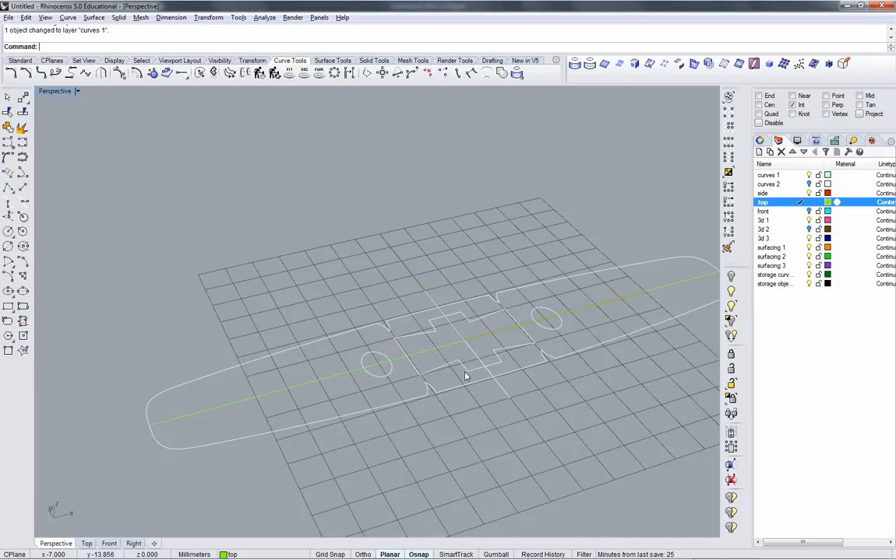Hi, it's Professor Tim Nelson with the Jewelry Design Department at FIT, continuing in our series of tutorials on making maquettes, this one for our cuff bangle. So, it's time for me to start surfacing this maquette.

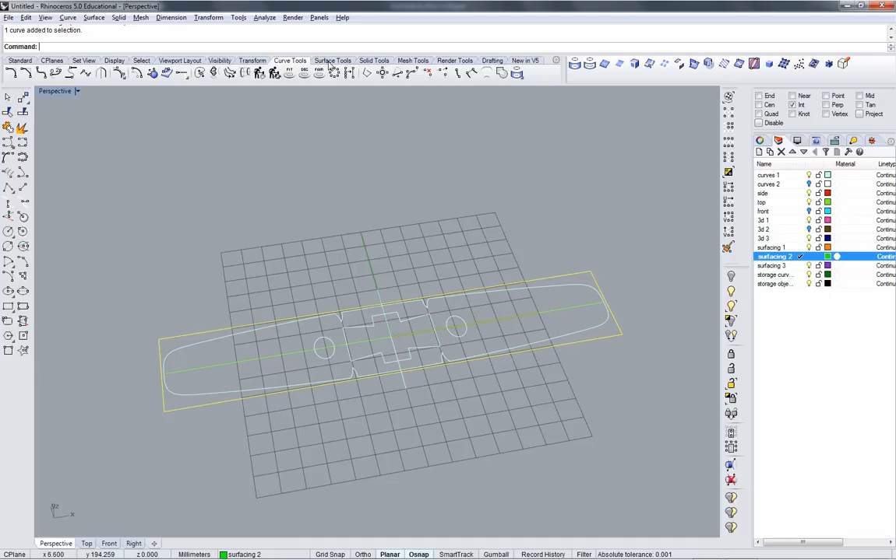I'm going to draw a rectangle from center. I just want a rectangle that's big enough to hold my object. That's fine, and I'm going to make a planar surface from it. I can then delete that curve. I'm going to rebuild this surface. I want to have 5 control points coming across and 11 going this way.

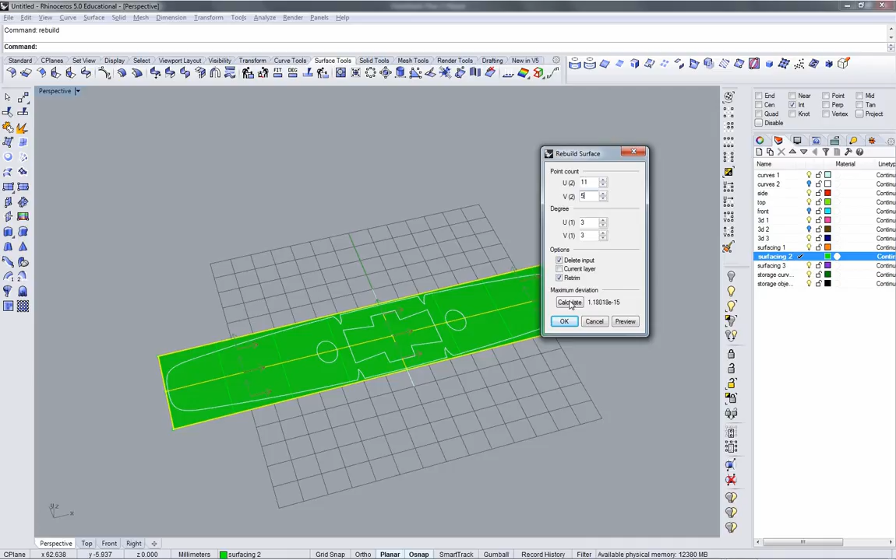That looks wrong to me. That looks better. See, I can see the partitions this way. Turn on my control points. Yes, that's what I expected to see. I'm going to move this off the ground. My maquette, my initial offset was about 4 millimeters, so I'll try that.

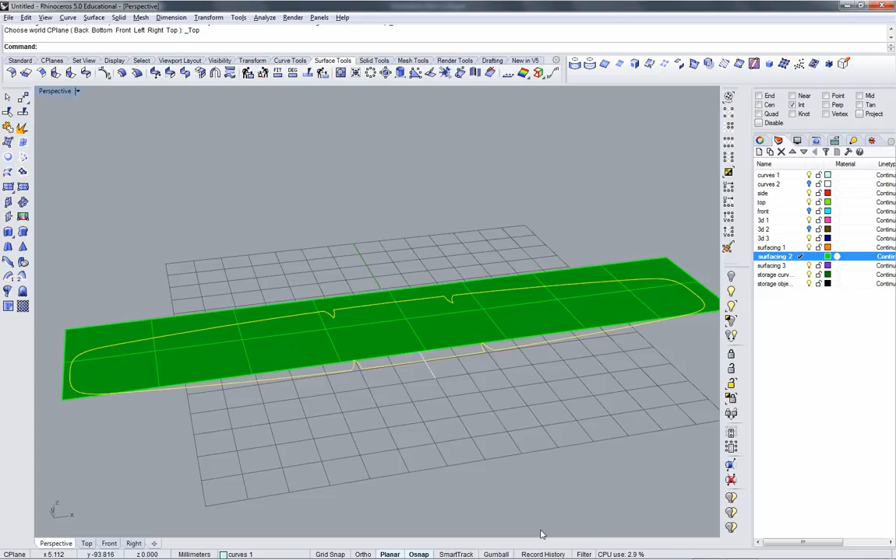And I'm going to take my outline, and I am going to record history and project it up. I have to change the top C-plane so I can project it onto that surface properly. So record history is on. Project, delete input, no, that's important because if you lose your input curve, history will be invalid, it won't work. I'm going to check and make sure this is working properly. It is. The curve's followed.

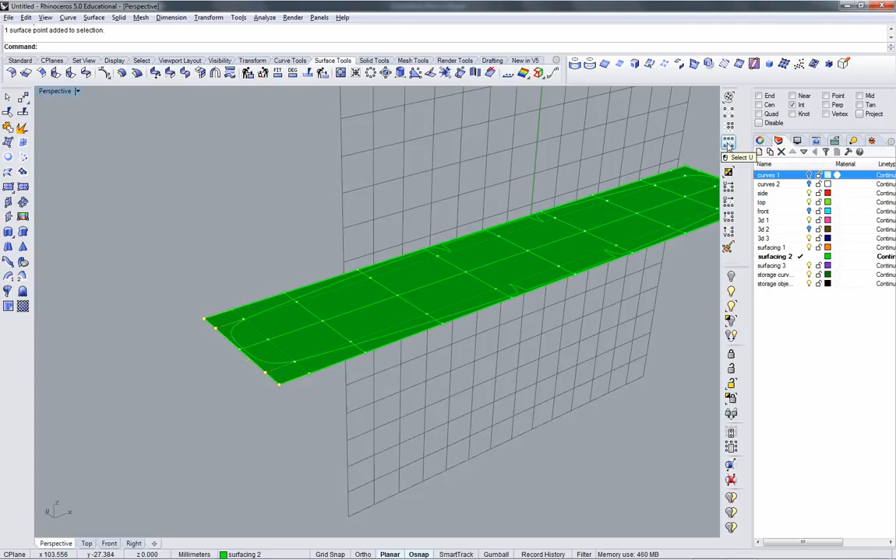Alright, turn on my control points. And I'm going to start doing some control point editing. Mainly want to move the outer 2 rows. So I'm going to select the points at the end here and I'm going to try select U. It could be either U or V. Oh, lucky. It's U. I'm going to move those down. Just by eye. And then I'm going to take the outermost row of points and move them down again.

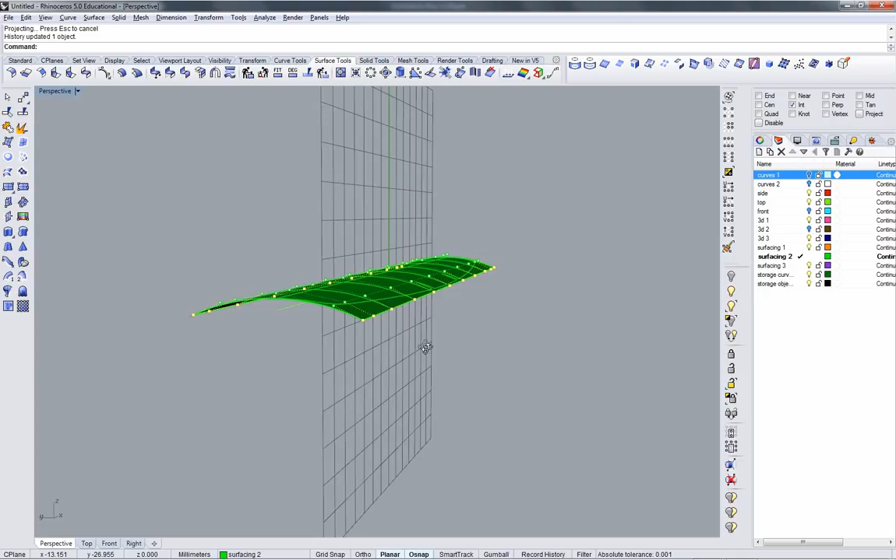And I'm going to grab the center row. I'm going to move it up. So I get a nice dome. You'll notice how the curve is following each step along the way. Now in my image, I have, well, it's got an edge and a fairly low dome, so I think that's actually pretty good. I want to kind of get a feeling of that rolled edge, so I'm going to insert knot.

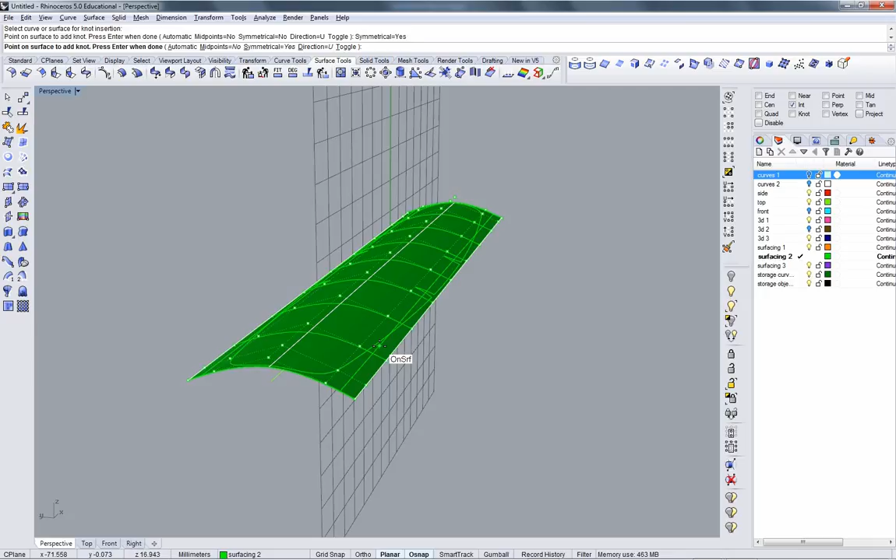Okay, it is going the proper direction. If it wasn't, I would hit toggle. But I want it to go symmetrical, so I'm going to hit symmetrical, yes. And I want to add the row of points between the outer 2 on each side. Just like that. I'm going to grab these 2 rows and move them up. And you see that allows me to get a harder roll off of that edge.

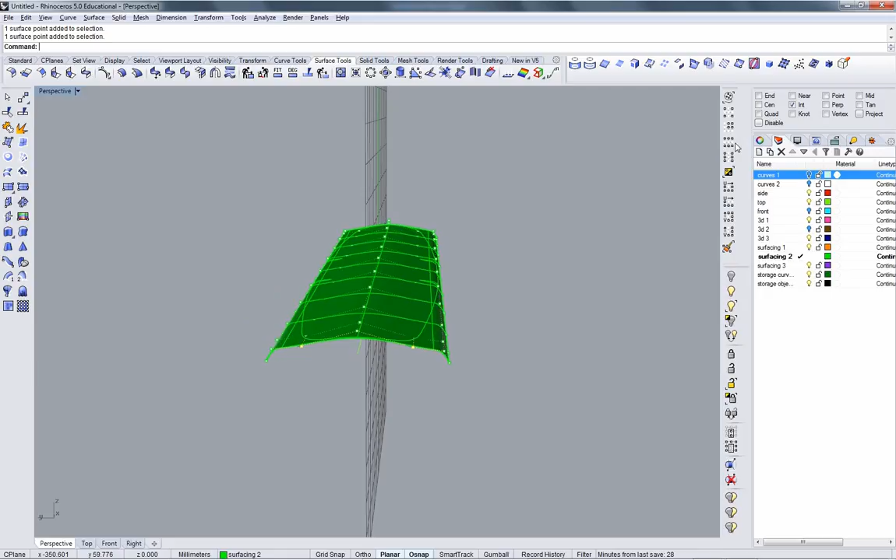Grab these. So, you know, I don't want to go crazy with effort here. It's not hard to do, and I'm here, I might as well do it. And then maybe move these back down just a little bit. May have been a little extreme. There, I like that.

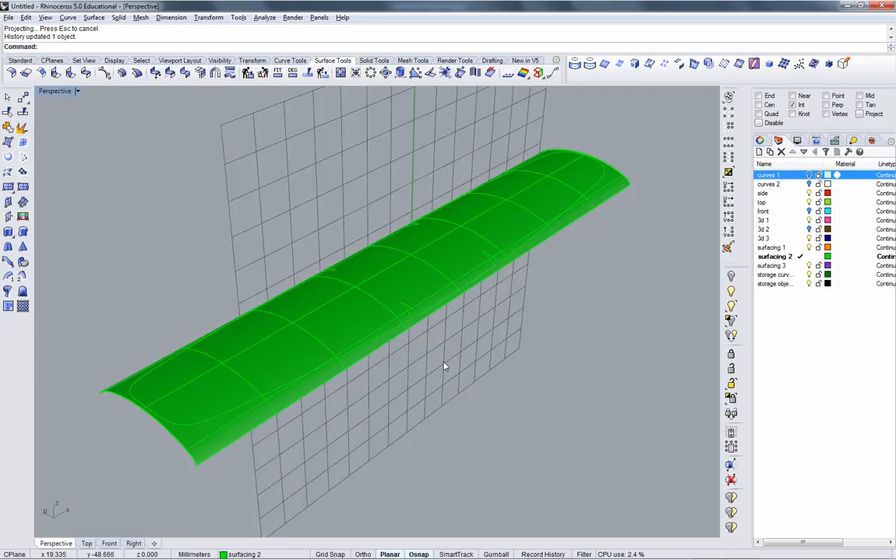Okay. The other thing I have to be aware of is, do you see how, from the front, my drawing is swooping up kind of like a pagoda at the ends? I don't want that. So I need to put them in a color I can see well. I'm going to turn the points back on. But now I'm going to actually dome it going this way a little bit. So I'm going to grab the 3 rows on each end, because I want it to be symmetrical.

Which is why, by the way, we put 11 rows, so we'd have a center row. Makes being symmetrical easier. I'm going to bring this down to about there. Deselect the end row. Move these two up a little bit. Deselect the second to the end row. And move this up a little bit. I'm not going to belabor it because it is a maquette.

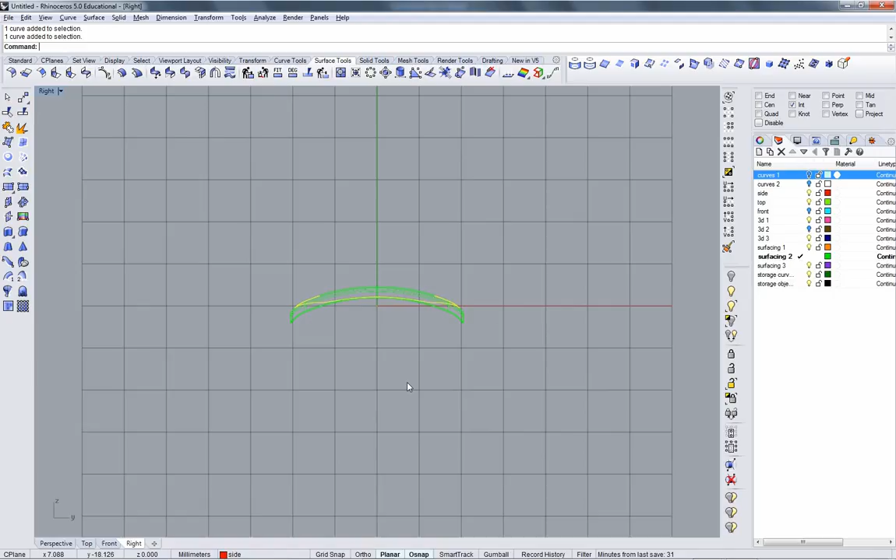I'm going to grab all 3 rows again on each end. It's not going down enough. And I'm going to grab this next row in. And I think that is better. Deselect the innermost rows back out again. And it won't be perfectly smooth, but this is a much more normal curvature. Okay, I'm all right with that.

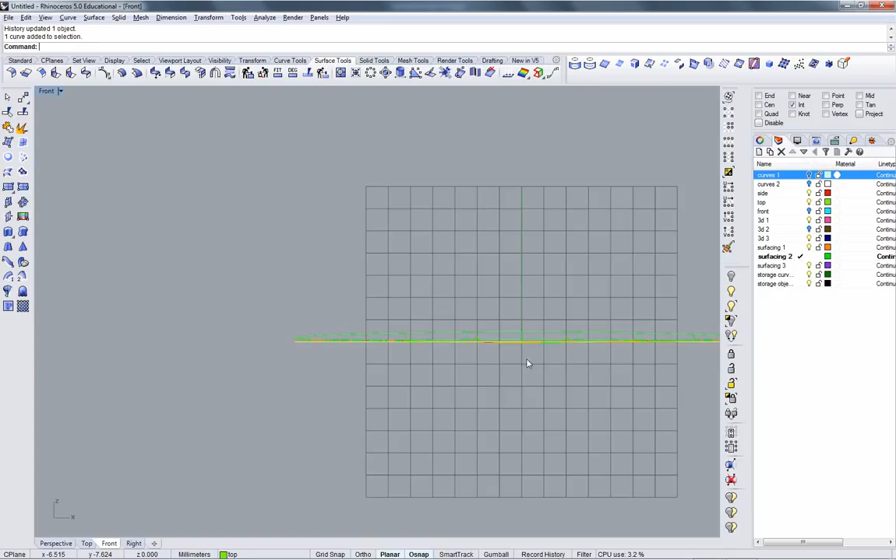I'm going to trim off the surface so I can see what I have. Now, this is supposedly the ground, and you can see that with the new curvature, the new surface I've made, it is right on the ground. I want to lift that up a little bit, because I do have an edge. You need to have an edge in every piece of jewelry, as we've discussed. You need to have an edge.

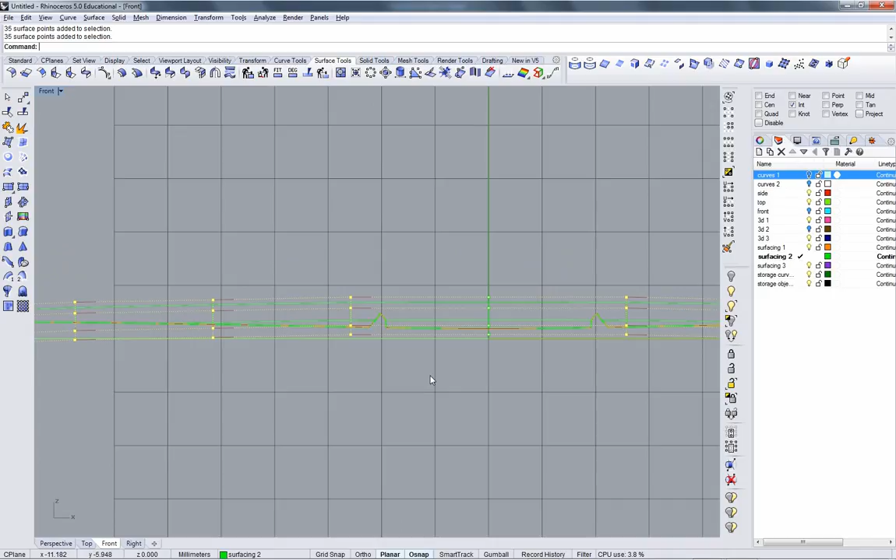So restore that edge, turn the points back on, and I want this edge to stay about the same thickness. So I will grab everything except for the center row on each side. Move it down a little bit. Take out these 2 rows. What I'm trying to do is have some consistency along the bottom.

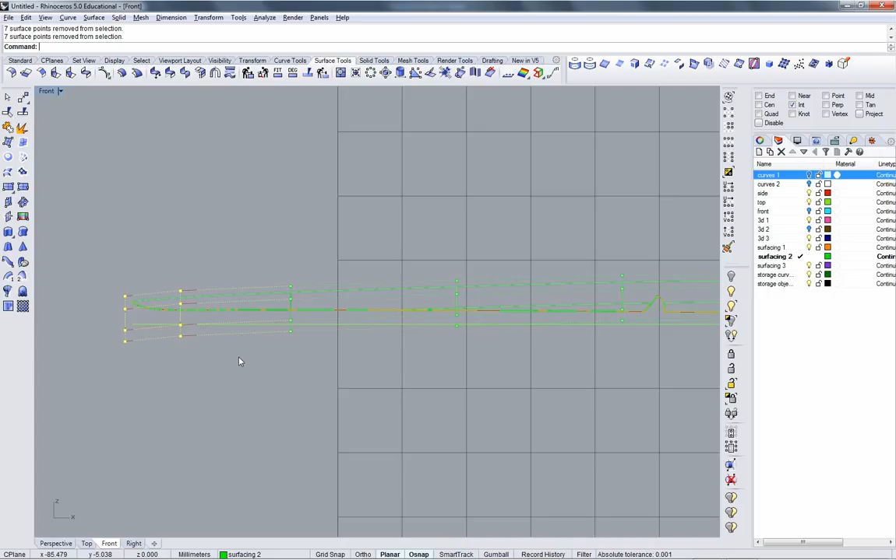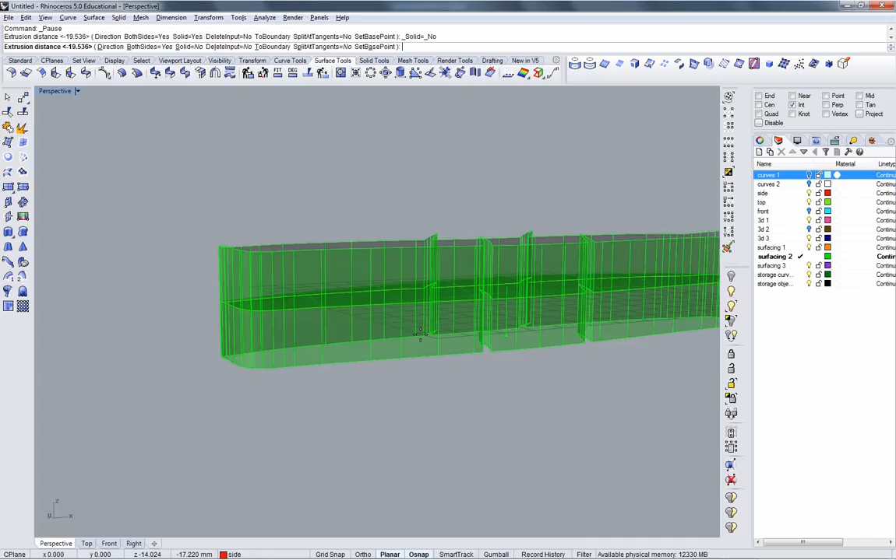And that's pretty good. Okay. I'm going to take this curve and I'm going to extrude it straight down. So I need the top C-plane active. Remember, extrudes were always perpendicular to the C-plane. So I want to go up and down extrude, so I need to be in the top C-plane.

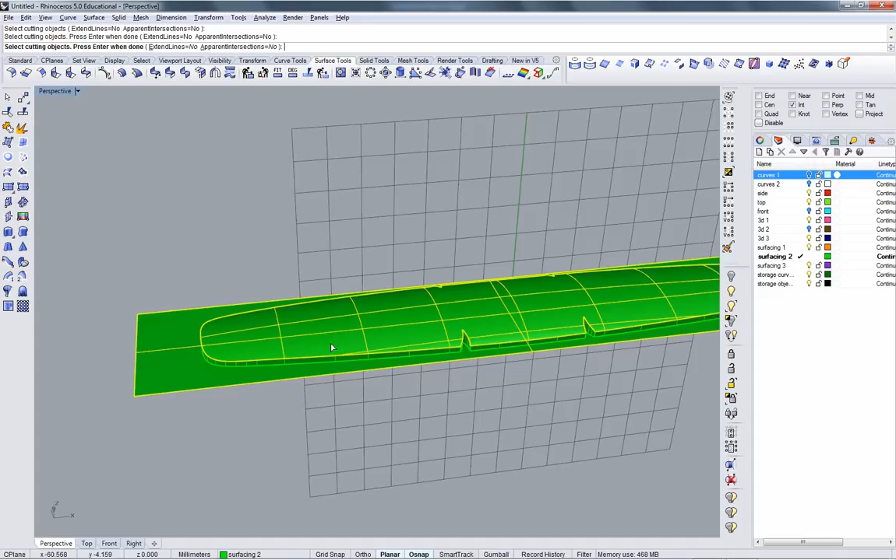I'm going to make it too long, quite a bit too long. And then I'm going to go back into front C-plane, do a cutting plane from 0, just to level off the back. I can delete this. I want to bring the rest of my curves up onto here. No, actually, the only thing I really want to bring up is this, and the way I'm going to bring it up is I'm going to extrude it, so I'll hold off on that.

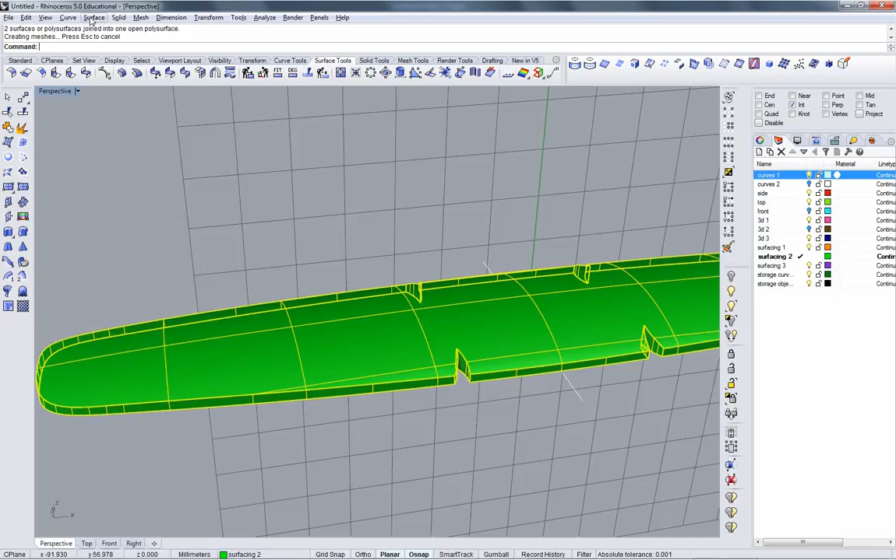I'm going to go ahead and join these together and cap the planar hole on the back. And now it's a closed polysurface. So now I can extrude out and Boolean the holes. I'll go ahead and extrude both sides so I have a good cutter. Solid, yes. Solid difference.

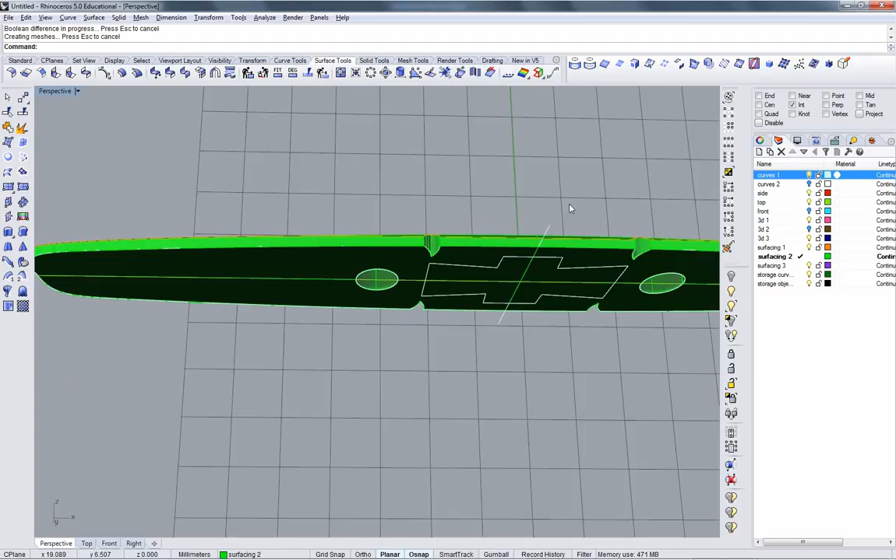Okay, the last thing I need to do on this maquette is this surface here. Okay. There's several ways I could do this. In the previous demo, I did it by offsetting surfaces and doing more extrudes. I'm going to do an orient on surface just because we don't cover that very often.

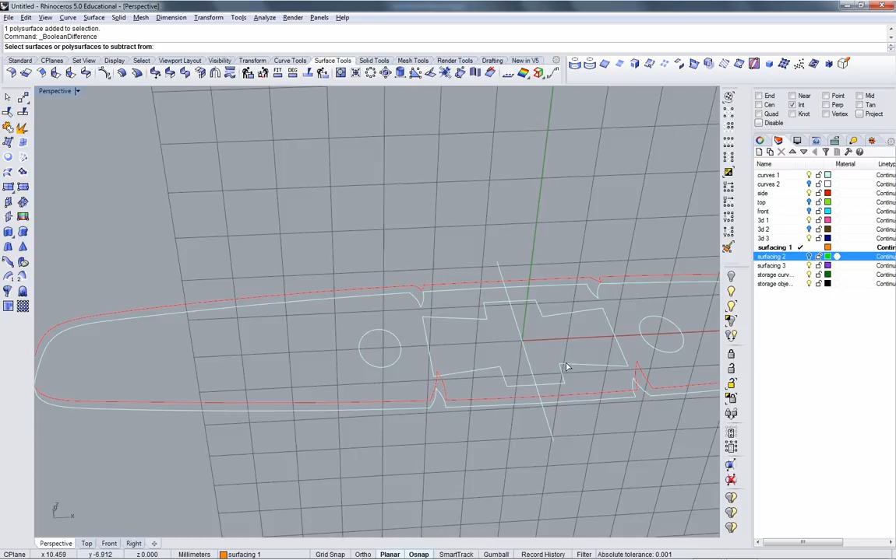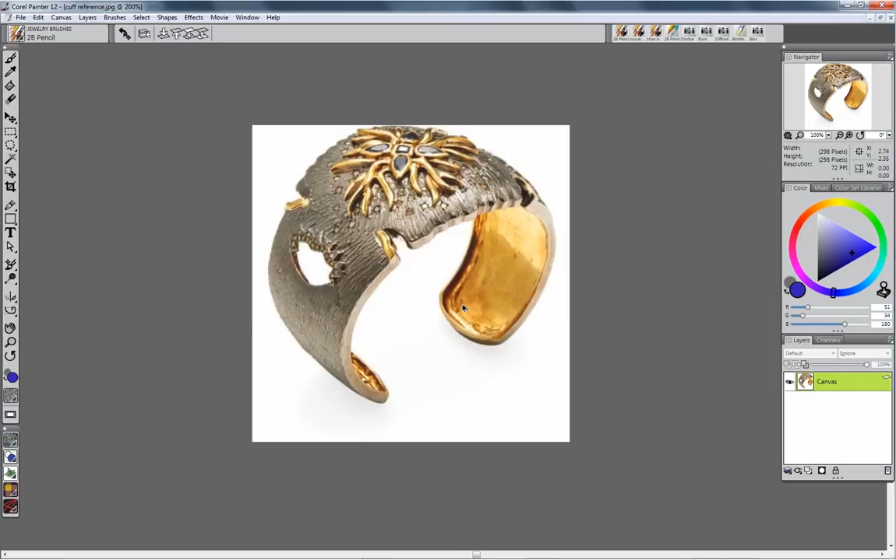So I'm going to grab my curve. I'm going to extrude it as thick as I think it should be. I'm looking at the top side though. I'm going to extrude both sides, but I only am interested really in the top portion. Look at my image. It's fairly low profile. That should be plenty. Okay. So I have this in position.

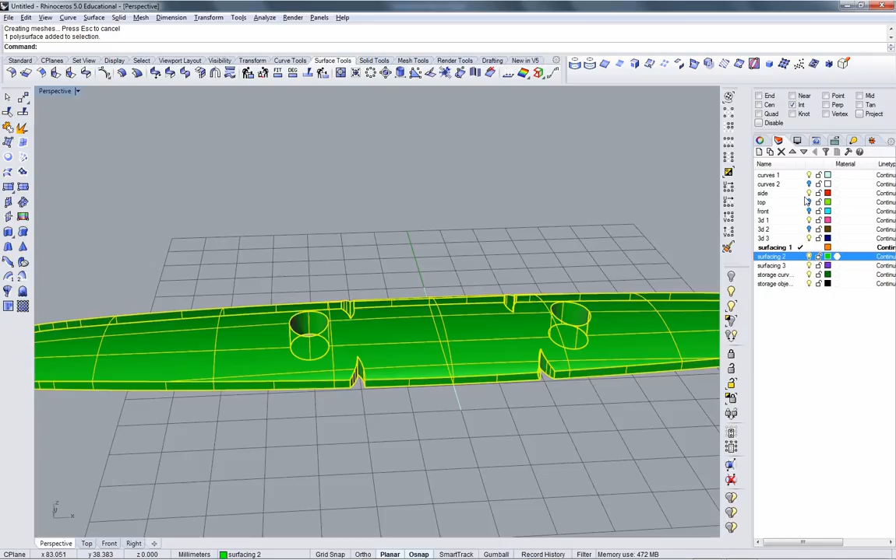What I need is an object snap that I can use to position it on the surface. I have several available to me. I can make one quickly. I'm going to do a section. So section command, grid snap, pull it straight across. I'm going to explode it, deselect the one I want, which is this, and delete the rest. I can now use a mid snap to get right in the center there, which is what I wanted.

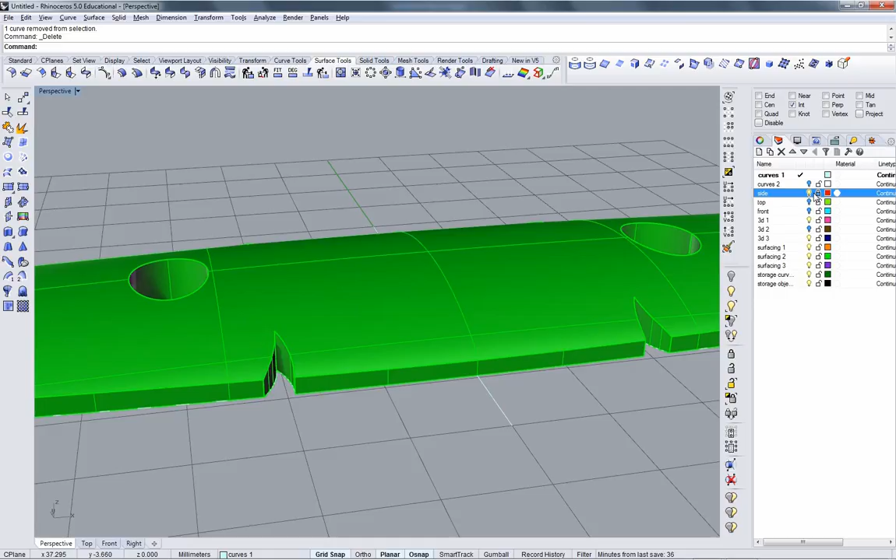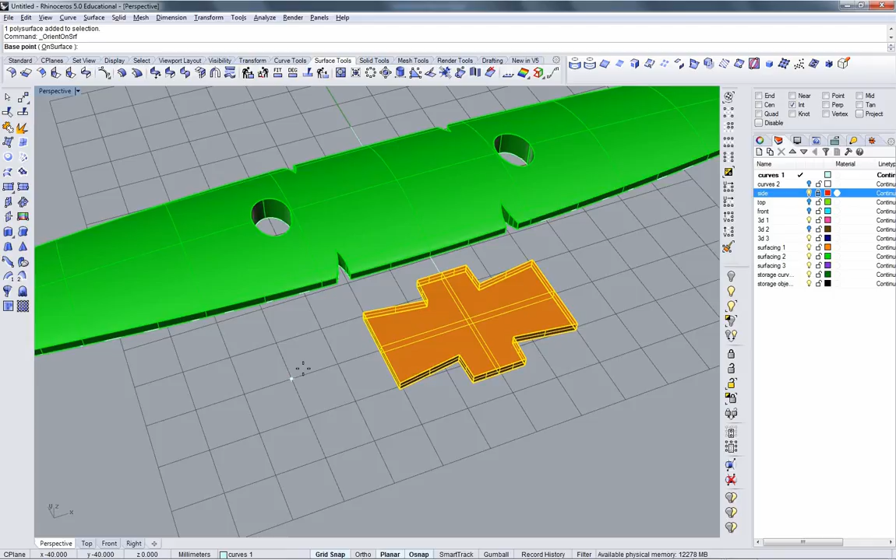Okay, so I'm going to take this. I'm actually going to move it out from under there so I can see it. And I'm going to orient on surface. Now, base point means what do you want to use to mark the center of this? I'm going to use the grid snap right in the middle. The reference point for scaling and rotation, I'll pull straight to the side. Surface to orient on. That one. Okay?

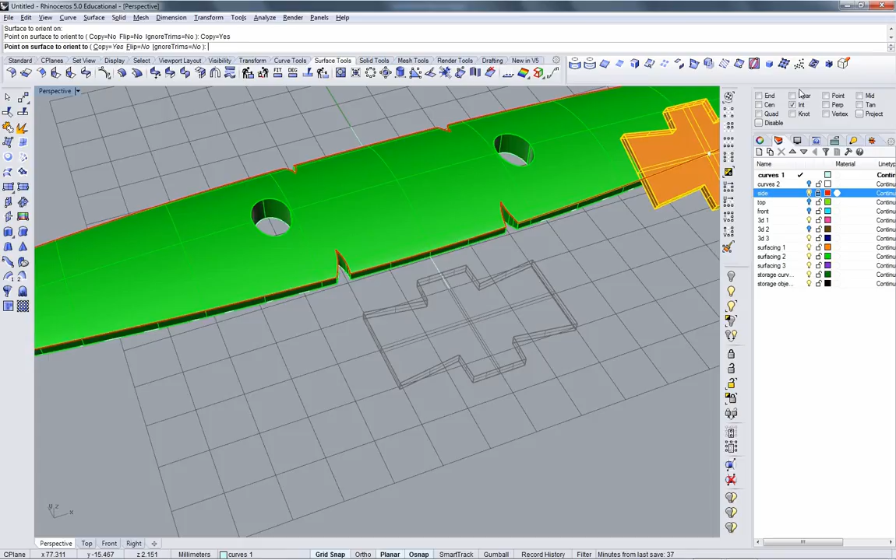I want the scale to stay uniform. I want the rotation, I don't want rigid. This is all good. Hit OK. This is important. I always hit copy in case I want to make more, although I didn't use history, so it won't matter in this case. So I'm going to back out and do history, because it's important to show you how that works. Record history.

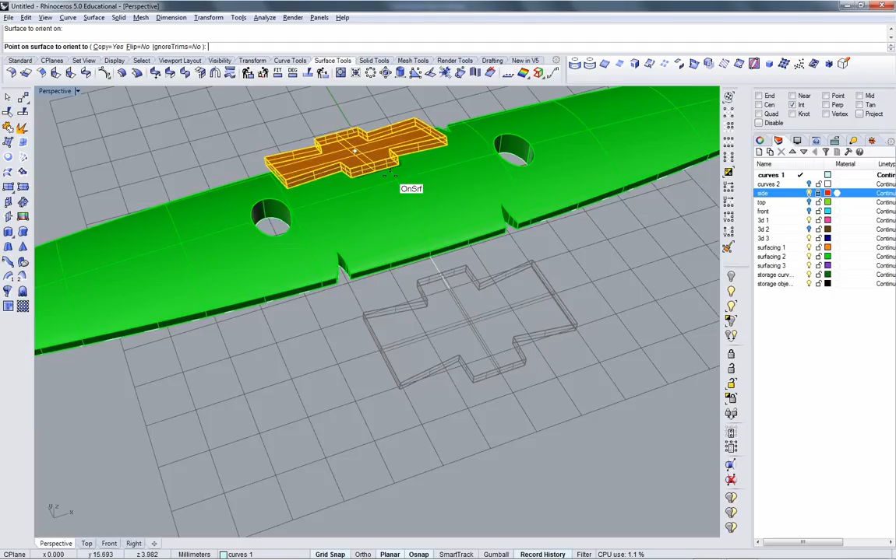Orient on surface. Base point, grid snap. Reference point off to the side. Surface to orient on. Accept the defaults, except make sure it doesn't say rigid. Hit OK. Copy should equal yes. And we want mid snap, because that's what we created that curve for. Okay? And copy equals yes means you can make more and more of them on the surface. We only want one. So we're done. And you'll see it placed it on the surface and wrapped it around the surface very nicely.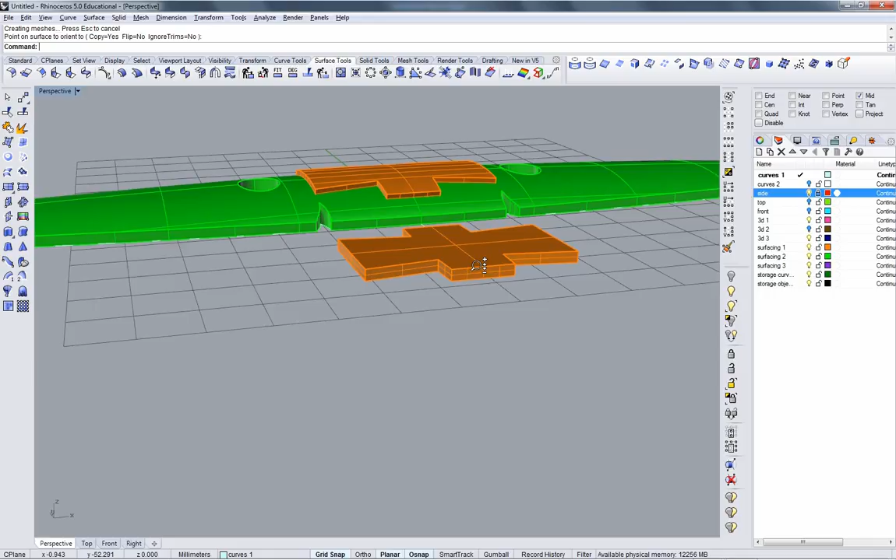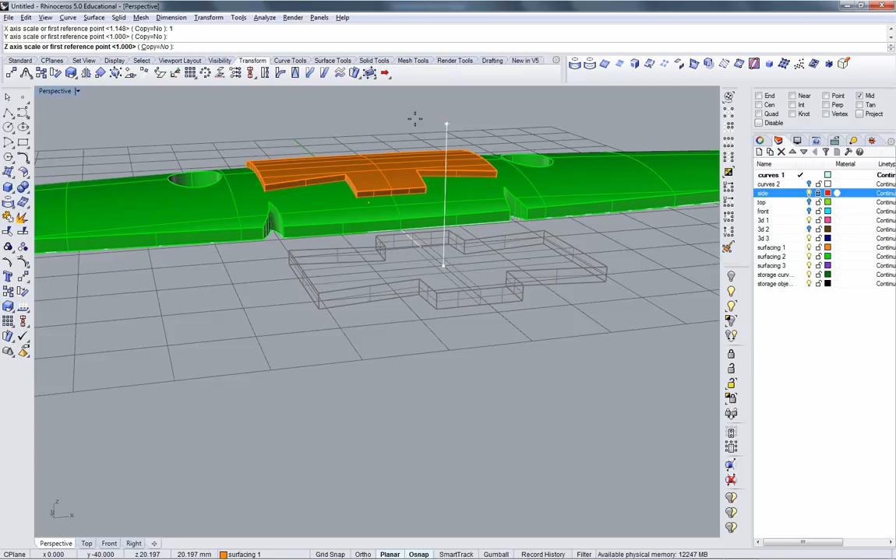Now, the reason the history is nice is that if I want to do anything more to this, it'll be reflected in here. Okay? So if I want it to be thicker, turn off grid snap for this. Actually, I picked the wrong origin point. There. I don't want anything to change here, so that's 1. Nothing here. 1. The Z reference I do. So let's say I wanted it to be a little thicker. You'll see that this thickened up automatically. Okay? Let's say I wanted to dome it in the middle.

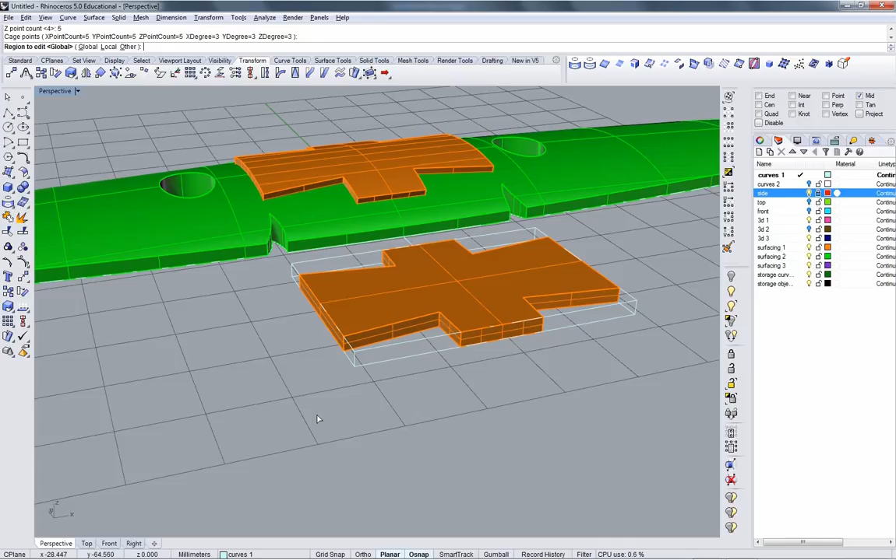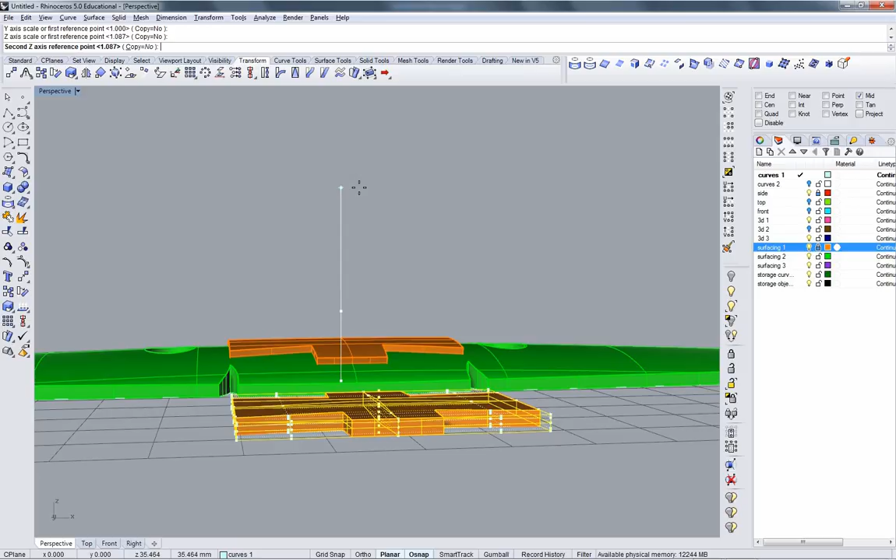Transform, cage editing, cage edit. Bounding box, world is fine. I want everything to be 5 so that it has centers that I can use. Alright, so now if I want to, I can reach into here, grab that row of points, and I can non-uniform scale that. And you will see that the belly picked up.

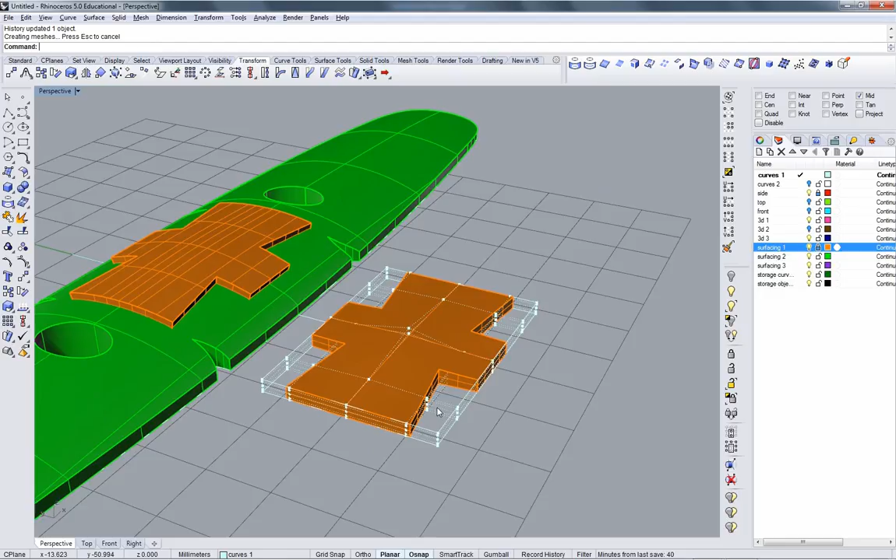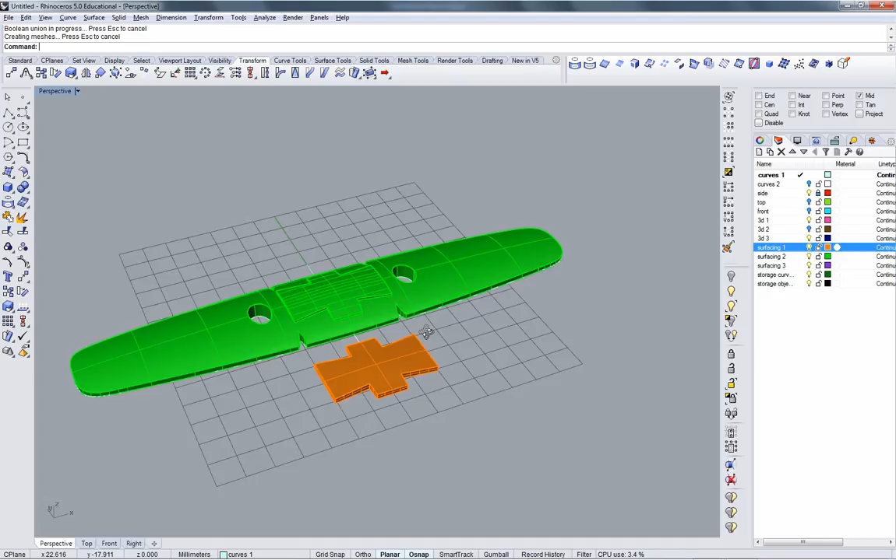So you can come in and nuance this all you want, and it will show up on the top object. All right. I am going to Boolean union these. Oh, sorry, I want that way. And I have my flat maquette. The only thing that remains to be done here is to flow it up on the curve. Okay? So I'm going to pause this video here.